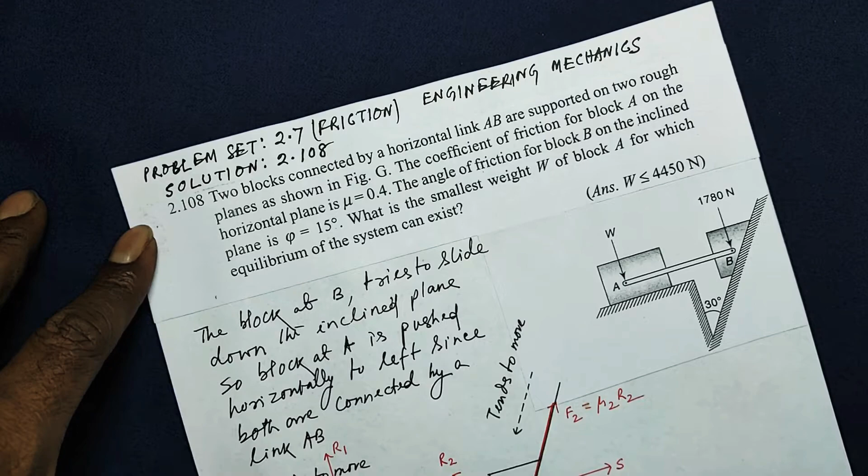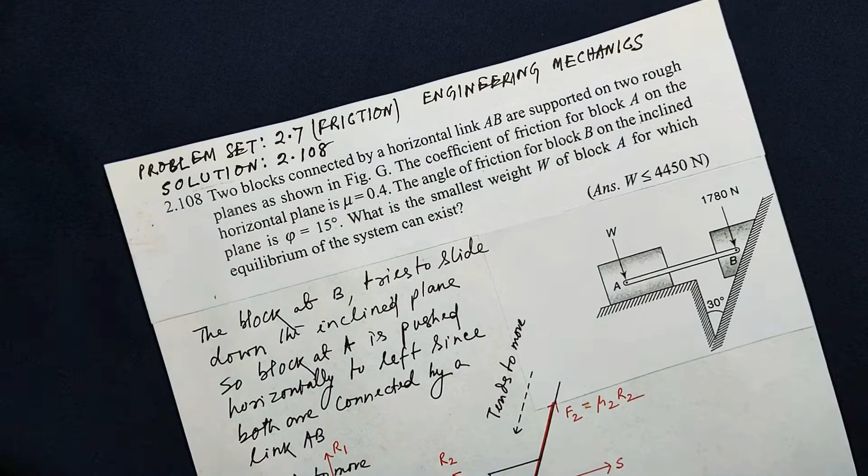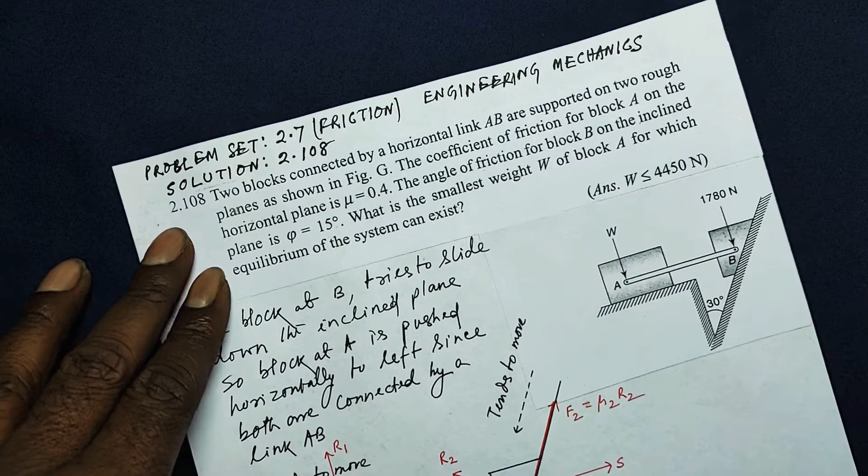Problem set 2.7 from the friction part, solution to 2.108. You can expect such kind of problems if you are an aspirant looking for your JEE Advanced.

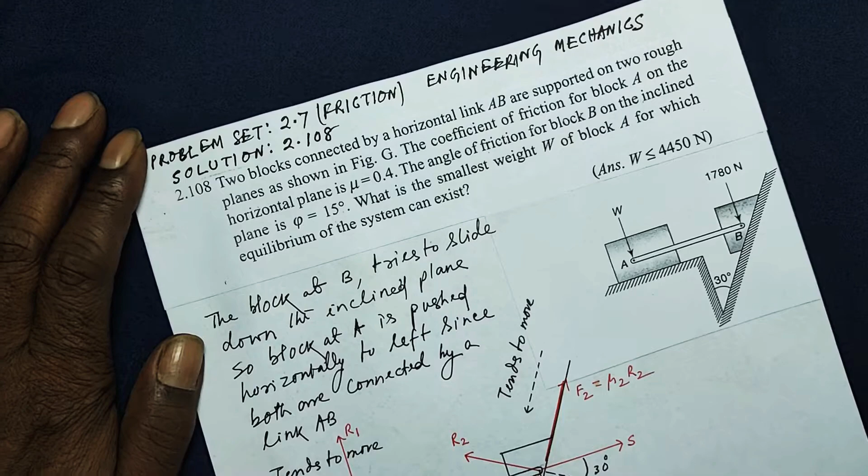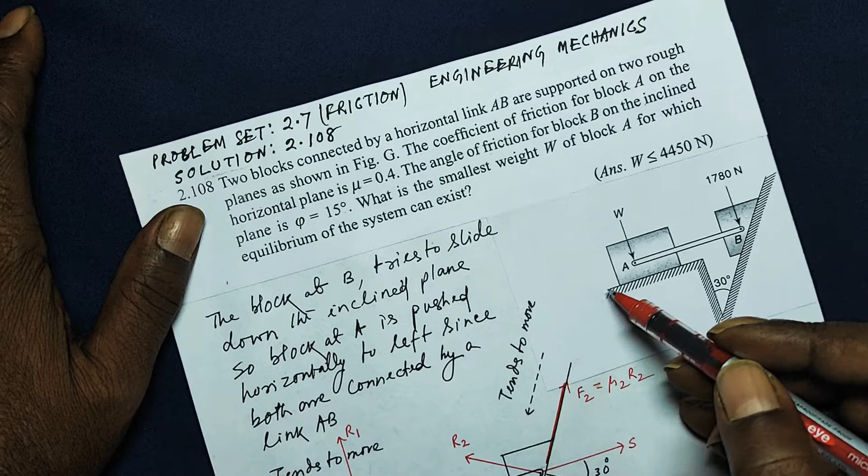So let me read out the statement. Two blocks: here is block A, here is block B. Block B is on an inclined plane, block A is in a horizontal plane, and both the planes are not smooth, there is friction. So two blocks are connected by a horizontal link, as you can look from the diagram, from A to B. This rod is a horizontal link connecting A and B.

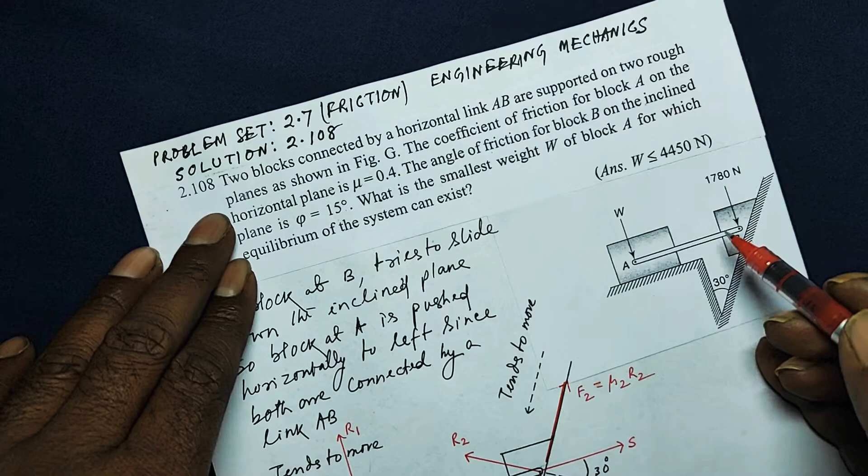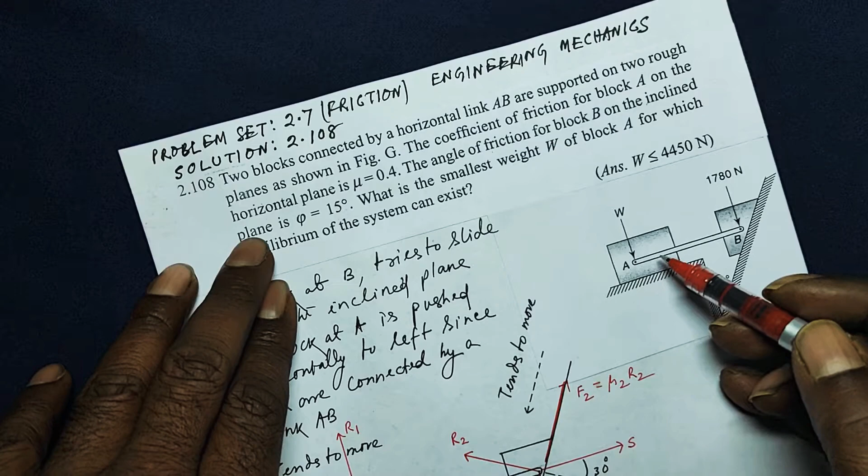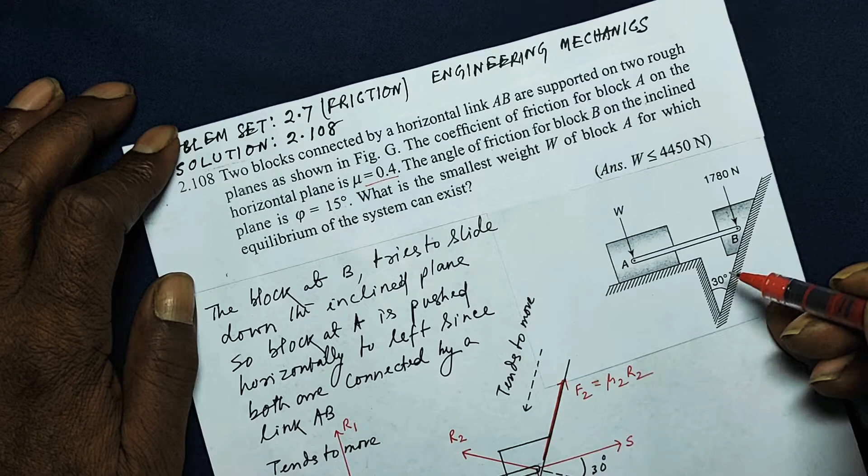Are supported on two rough planes as shown in figure G. The coefficient of friction for block A on the horizontal plane, between block A and this surface, is given as mu equals 0.4, and for the inclined plane, when block B is trying to slide down, instead of giving the coefficient of friction directly, it is given as the angle of friction for block B on the inclined plane, phi equals 15 degrees.

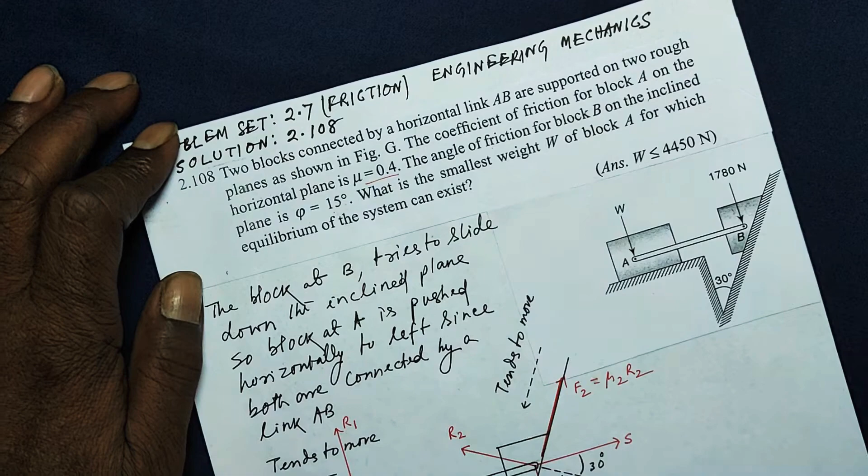What is the smallest weight W of block A for which the equilibrium of the system can exist?

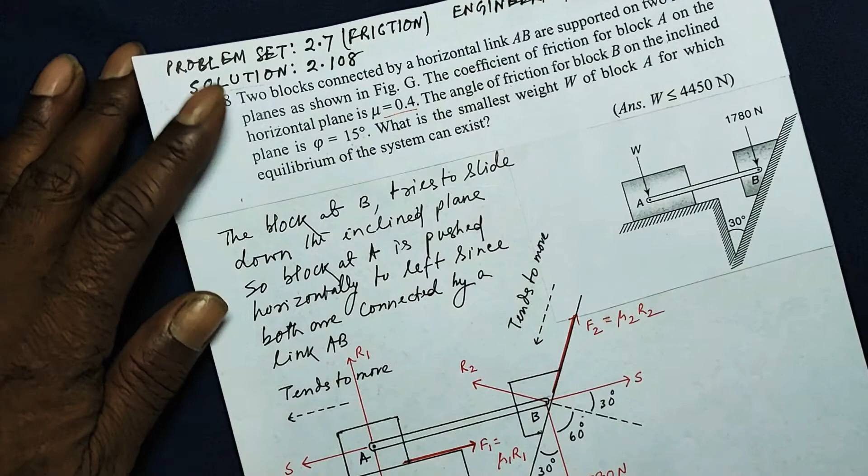So let me explain. There are two blocks, and block B tries to slide down because of a component of its weight.

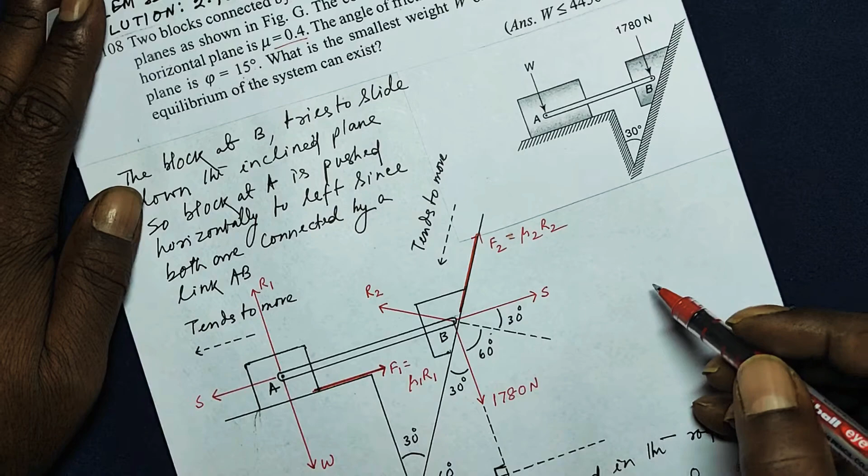As you know, if there is an object on an inclined plane like this, given this angle is theta, its weight is vertically downward mg. So to this side will be mg times sine theta. This is a force. Mg sine theta is therefore a force. So when a block is kept on an inclined plane, it tries to slide down because of mg sine theta, provided this angle is theta.

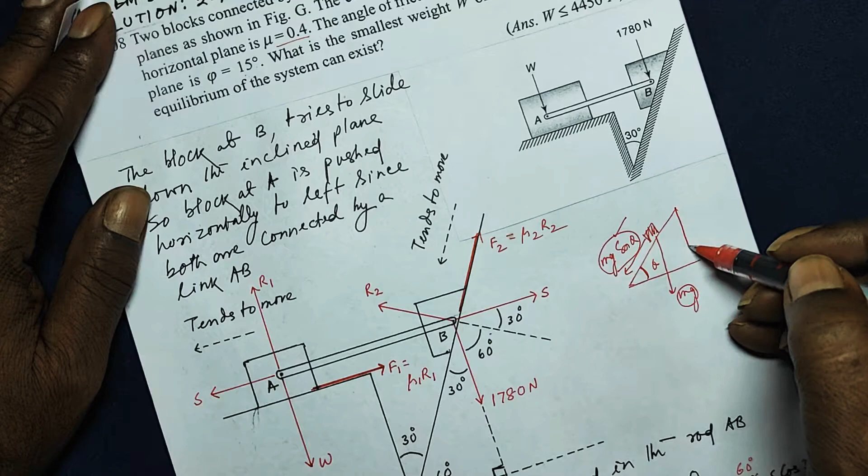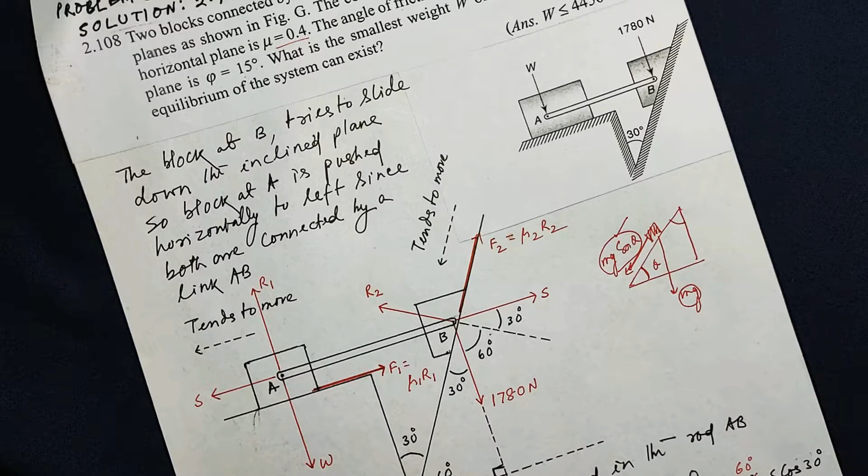Now, if this angle is theta, then this component will be mg cos theta. So one of its components tries to make it slide down the inclined plane. So block B tries to slide down the inclined plane.

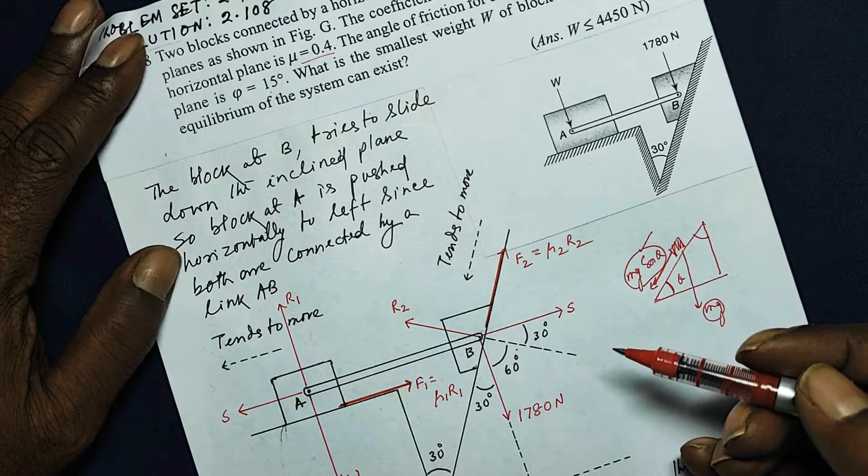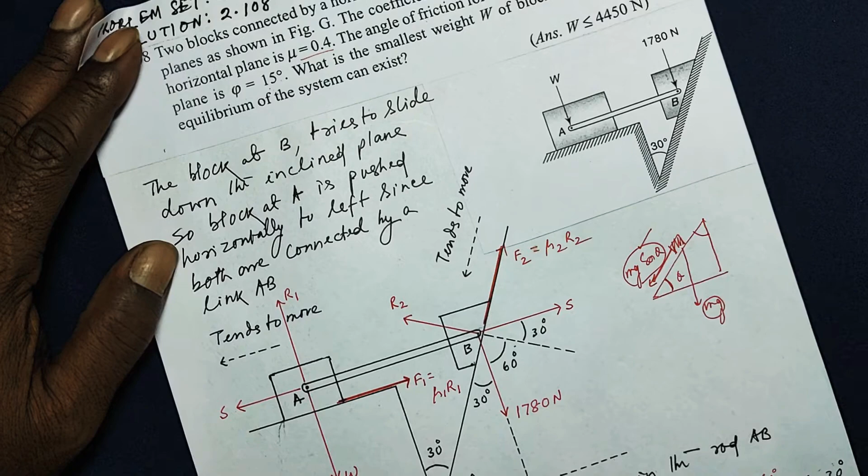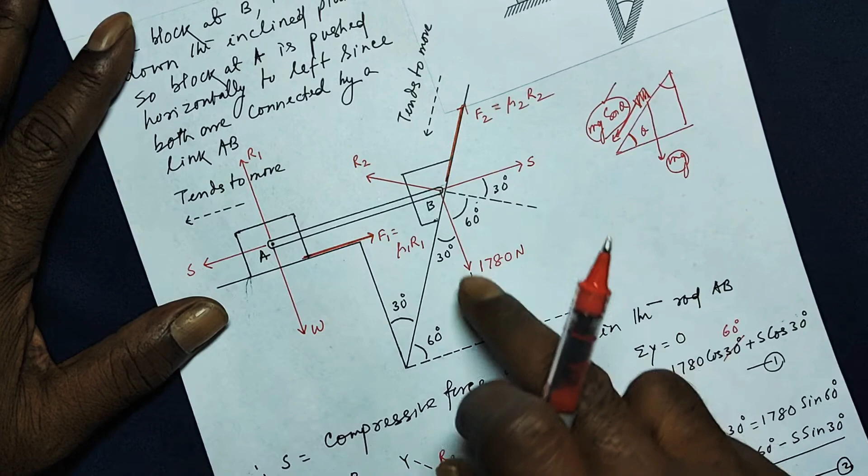So block A is pushed horizontally to the left. When block B is trying to slide down, block A is pushed to the left because both are connected by a link AB. So I have redrawn the diagram for you for better understanding, and the different forces are shown in red color. The same diagram is redrawn here.

So this angle is 30, this is given for block B. The weight acting vertically downward is given as 1780 Newton. Therefore this angle is 90. So in this triangle, this will be 60, because the sum of the three angles in a plane triangle, not a spherical triangle, a plane triangle, is 180.

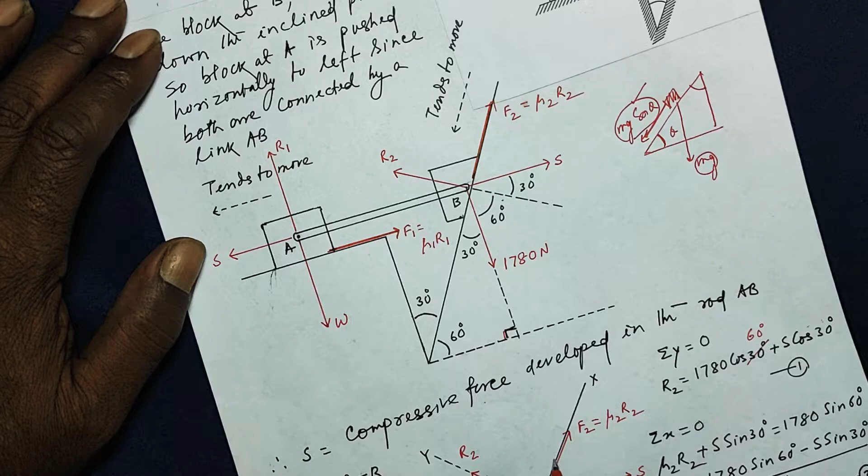Now this is given as 60. Since block B is trying to slide down, it is tending to move this way, so the force of friction F2 is to this side, that will be mu2 times the normal reaction, where mu2 is the coefficient of friction between block B and the inclined plane. And when block A is pushed to this side, towards the left, between the surface of contact, between this surface and the lower part of block A, the force of friction, let it be F1, will be mu times the normal reaction here.

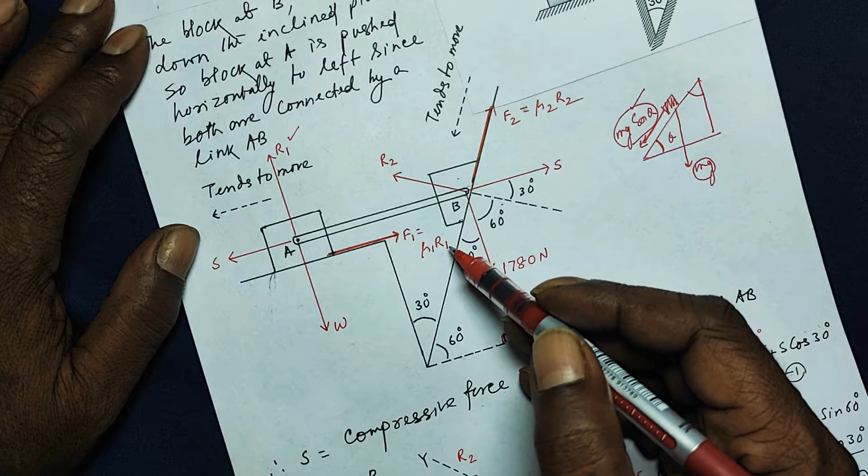And the action force is W, so the reaction force is, let it be R1. So F1 will be mu1 times R1. And in the connecting rod, connecting block A and block B, there will be a compressive force: for block A it will be to this side, and for block B it will be to this side.

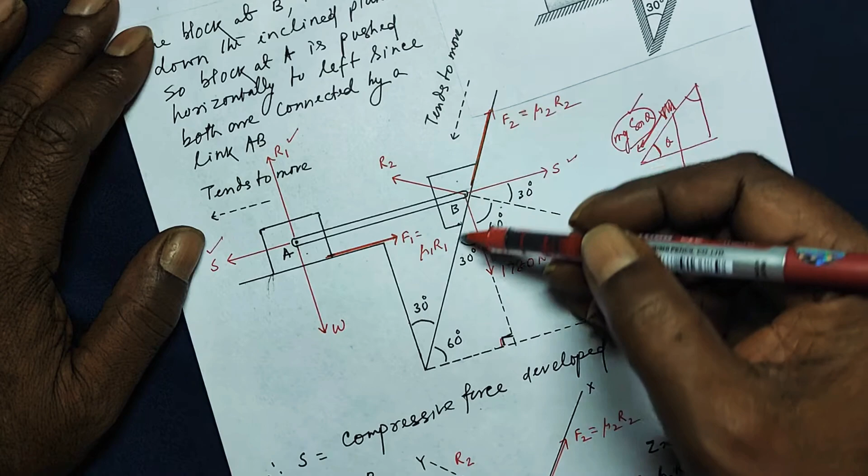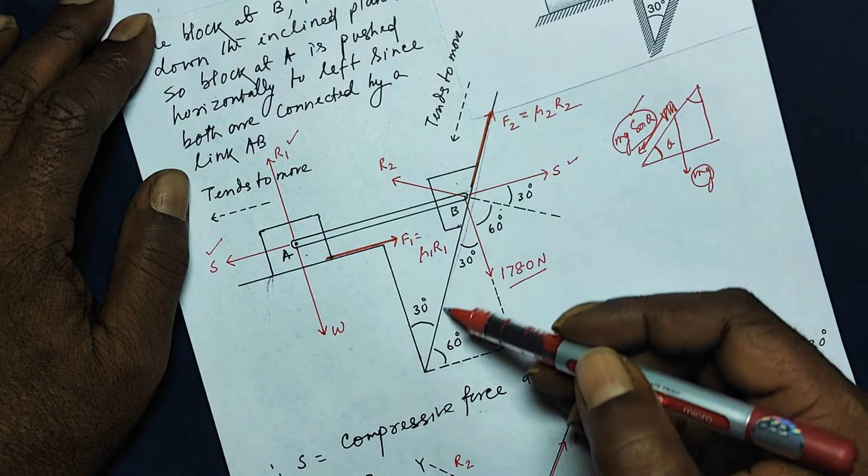Now all the forces are shown here. Here the reaction force R2, normal reaction, because this is the surface, so the reaction will be normal to that, R2. And why R2 will arise? Because a component of this 1780 Newton will be pushing this inclined plane to this side, called action force. So due to that, there will be a reaction force R2 exactly opposite to that.

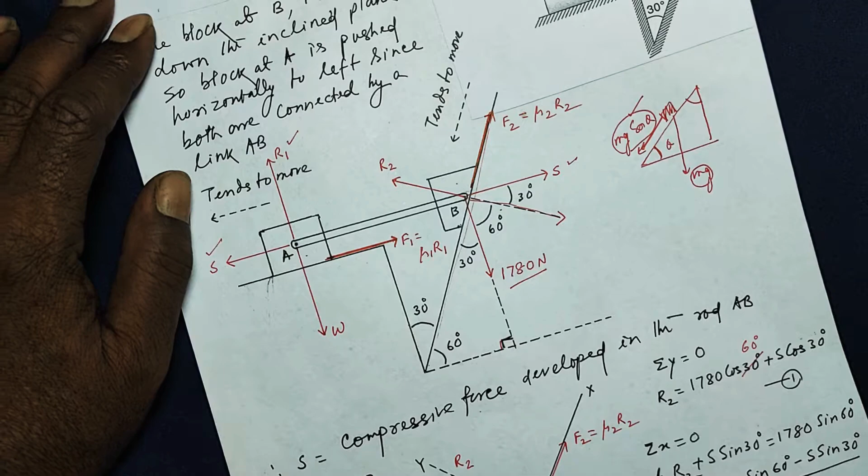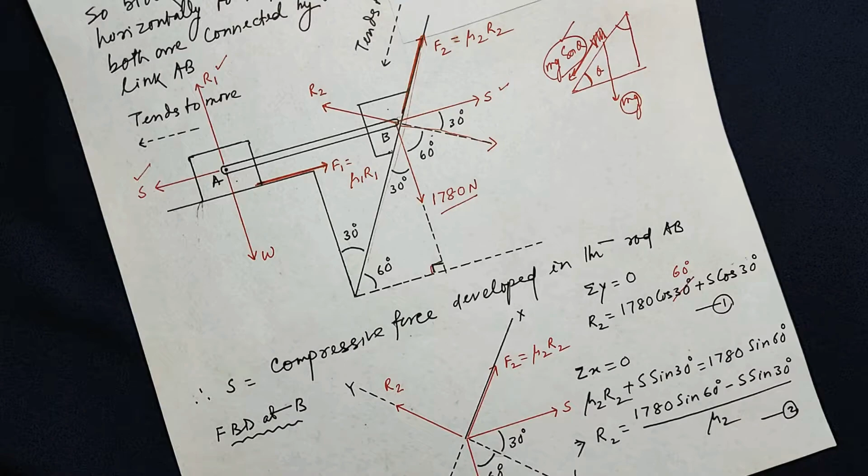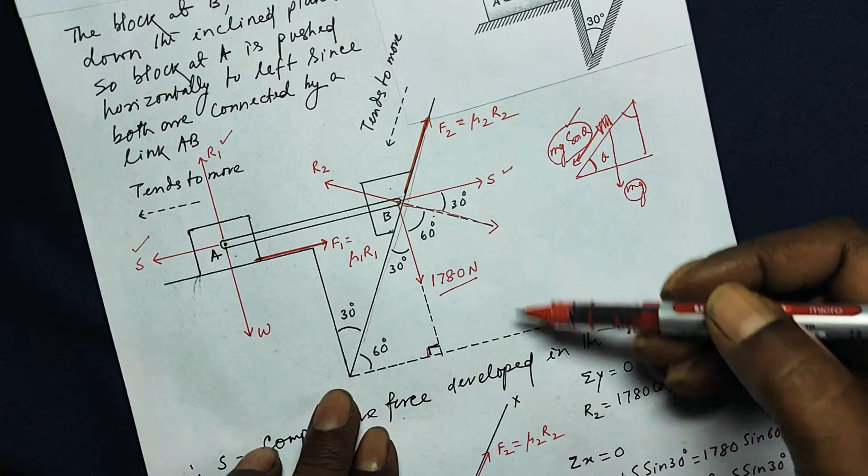Now, once that is clear to you, let us consider point B and resolve the different forces along the x-axis and y-axis. Let us consider this as x-axis and this as y-axis, which I have redrawn here in a different diagram. So this is your x-axis, and this is your y-axis, right?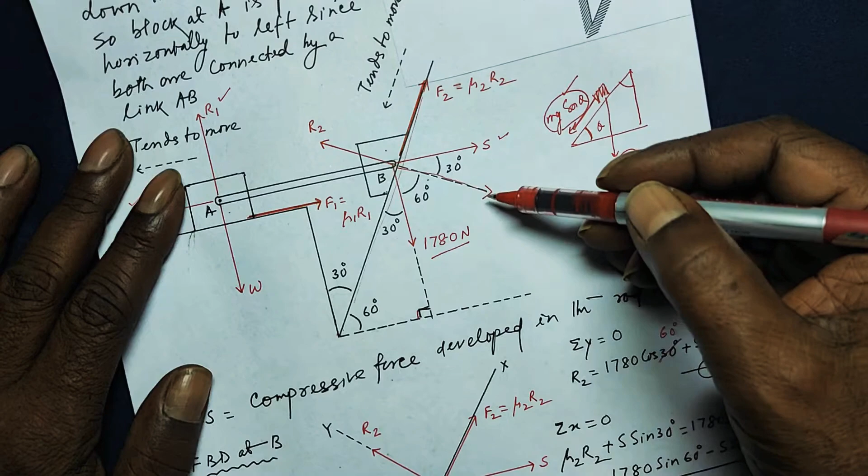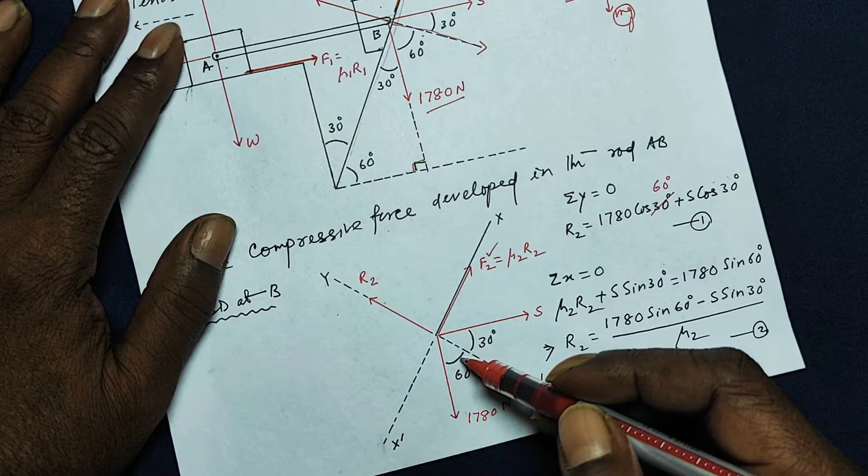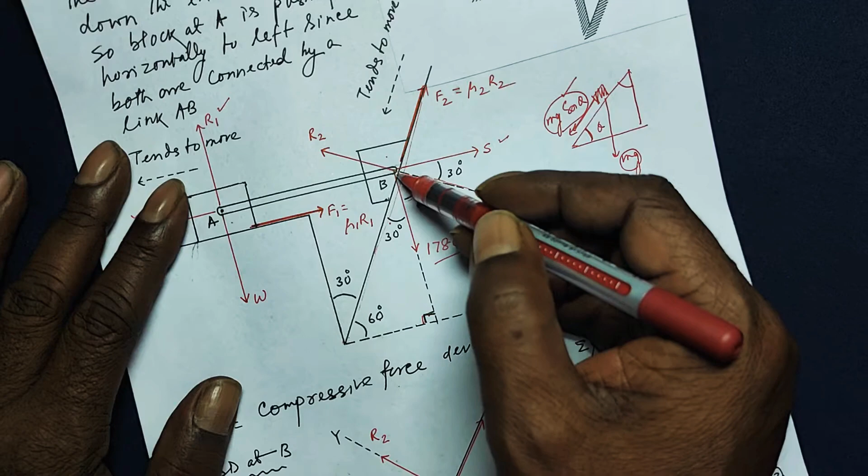So F2 is along the positive x-axis, the force of friction between block B and the inclined plane, and the weight 1780 Newton acting vertically downward. This angle, I explained how this is 60, because this is 90, 60, 30. This is x-axis, this is y-axis, so this has to be 60. This is vertical, this is horizontal, so this will also be 30.

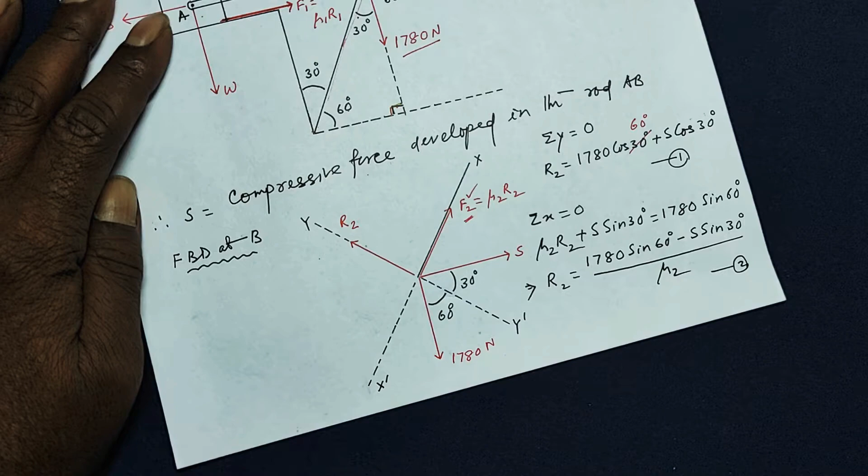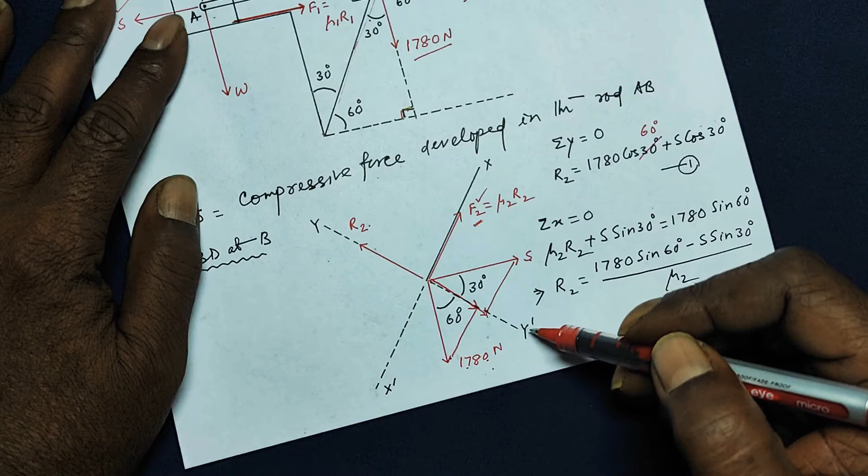Now let us apply sigma y equals 0. F2 is completely along the x-axis, so this will not have a y component. Now R2 is along the positive y-axis, so that is to be balanced by forces along the negative y-axis. If you drop a perpendicular from the tip of this force to here, that will be 1780 times cos 60, and from here if you drop a perpendicular on the negative y-axis, that is the component of S along negative y-axis, so that will be S cos 30.

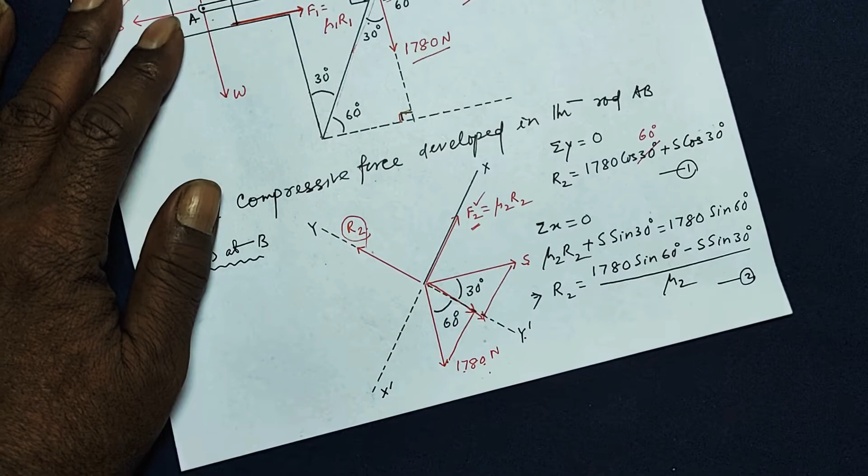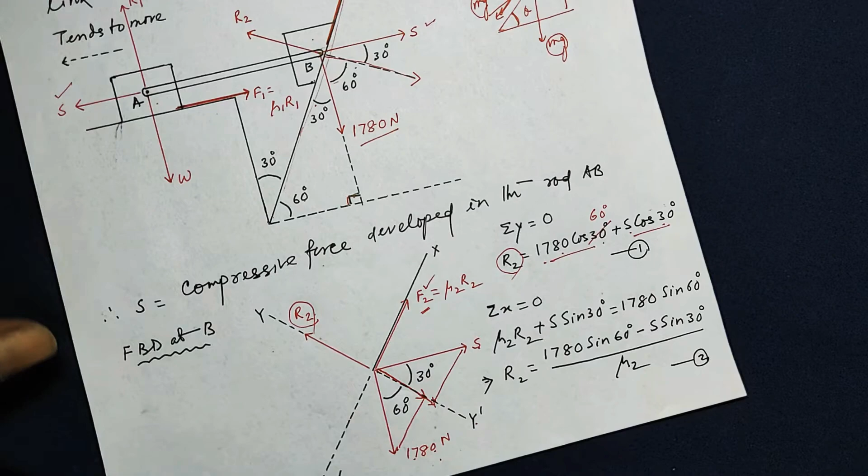So R2 is opposed by two forces, that is 1780 cos 60 and S cos 30. These two are along the negative y-axis, and this is along the positive y-axis. So for equilibrium, I make them equal. Now then apply sigma x equals 0.

F2, that is mu2 times the normal reaction R2, is along positive x-axis. So that is to be balanced by some forces along negative x-axis. The component of 1780, if you drop a perpendicular from this point to this point, this component will be 1780 times sine 60.

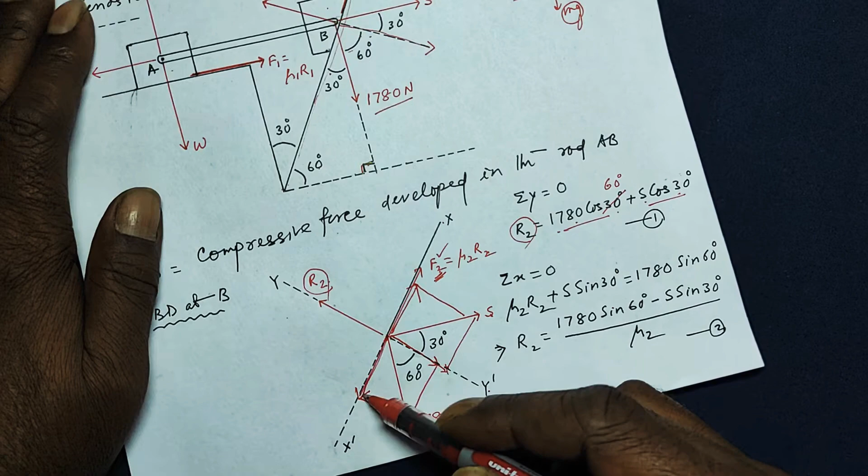And if you drop a perpendicular here, this one will be S times sine 30. So S times sine 30 and F2 are along positive x-axis, balanced by this component of 1780, that is 1780 times sine 60. That is what I have written in equation 2, taking sigma x equal to 0.

Mu2 times R2 plus S sine 30, because they are in positive x-axis, balanced by 1780 sine 60 along negative x-axis. Take this term to the right hand side and mu2 to the right hand side, so you are left with R2 equal to 1780 sine 60 minus S sine 30, over mu2 — your second equation. Here is R2 and here is R2.

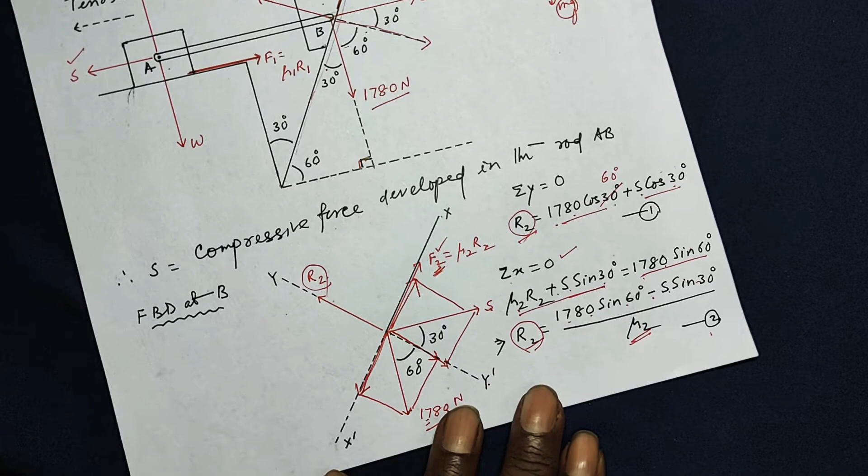So let us make them equal in the next phase and solve and find out the value of S.

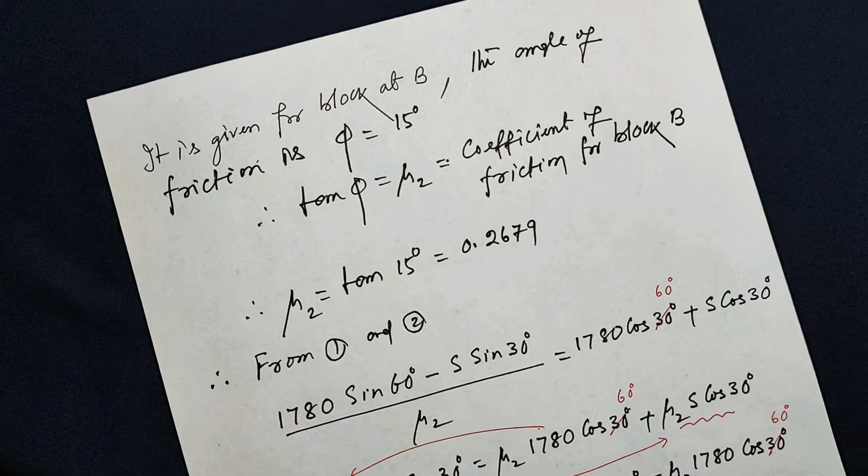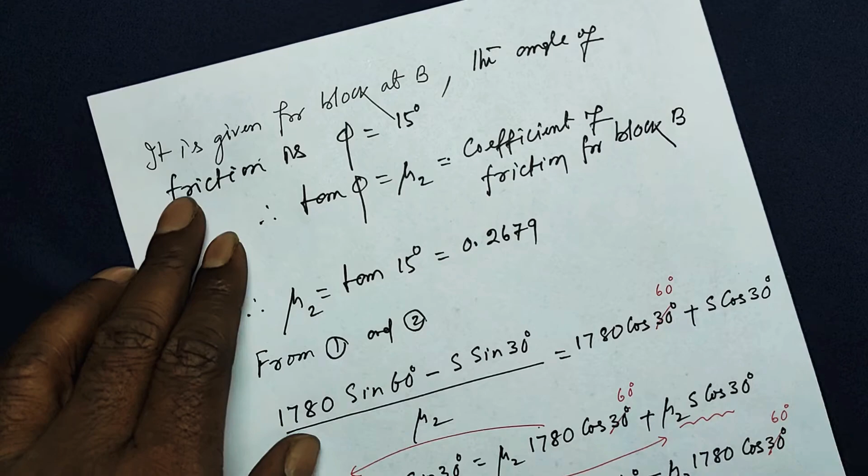Now the question is, how much is mu2 here? Mu2 is not known directly, but it is given for the block B, the angle of friction phi is 15.

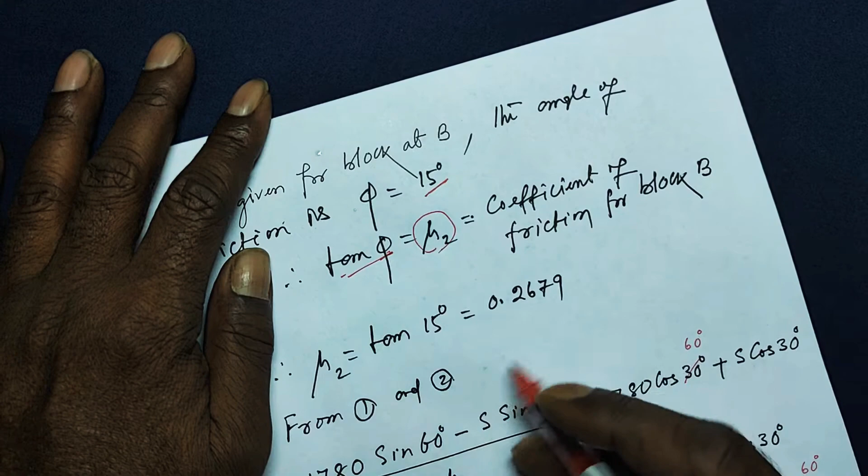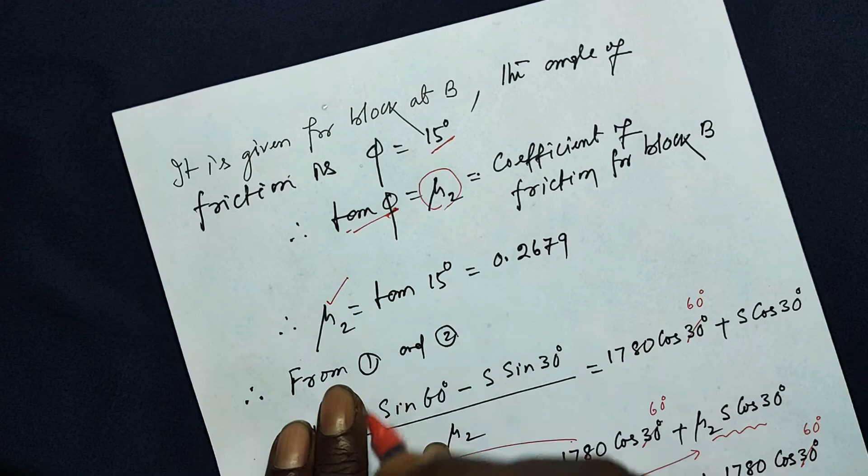In your school days, you must have learned the angle of friction or the angle of sliding — tangent of that is nothing but the coefficient of friction. Since phi is given in the question as 15 degrees, tan of 15 will give you the coefficient of friction mu2 between block B and the inclined plane. That comes out to be, if you put it in a scientific calculator, 0.2679.

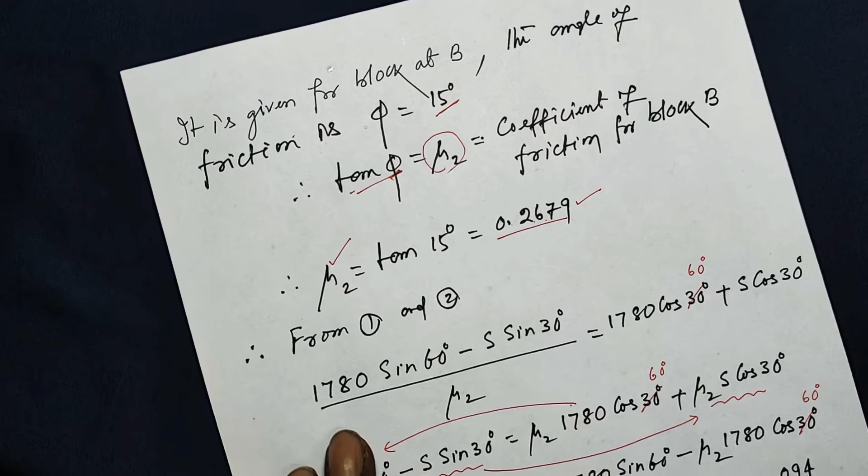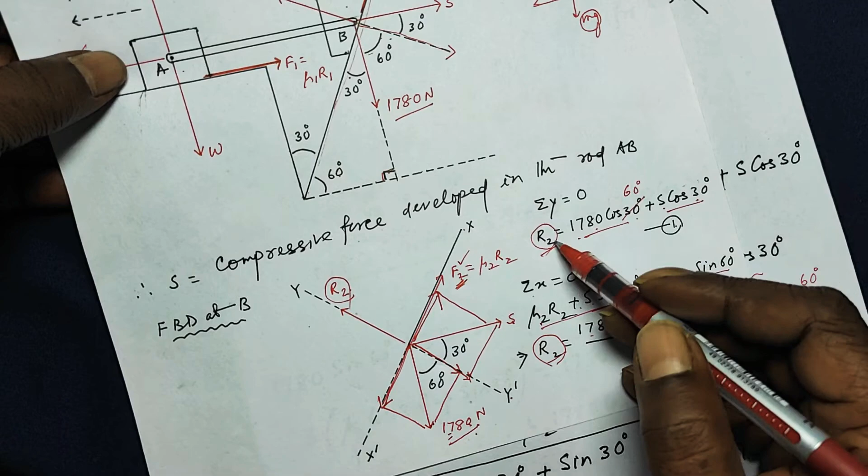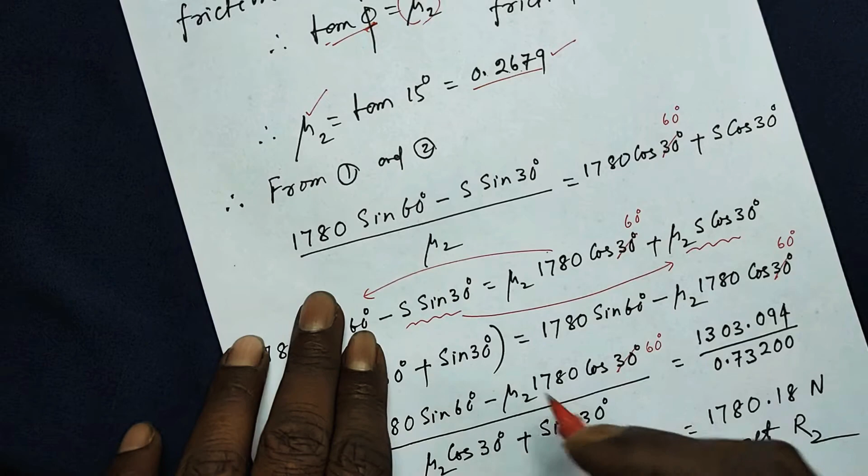Now make the right hand sides of equation 1 and equation 2 equal, because the left hand side of equation 1 is R2 and the left hand side of equation 2 is also R2, so the right hand sides must be equal. So I have made the two right hand sides equal.

Make a small correction here — this is not 30, this is 60.

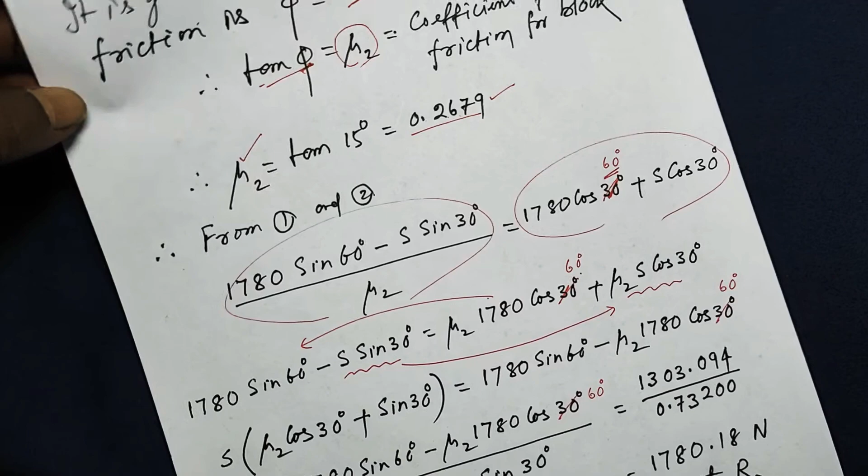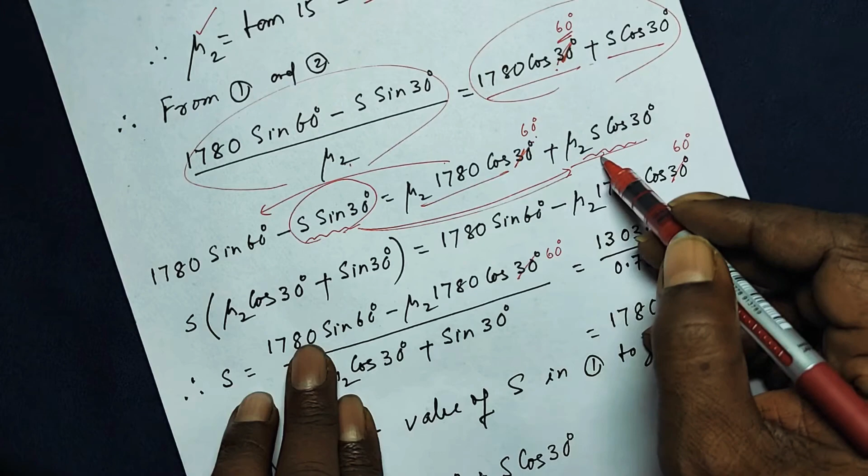So what you do is cross multiply. If you cross multiply, mu2 is taken to the right hand side, so it's multiplied here, and mu2 is multiplied here also. Now you have to make some side changes — bring this term to the right hand side, keep it with this term so you can take S common, then bring this term to the left hand side.

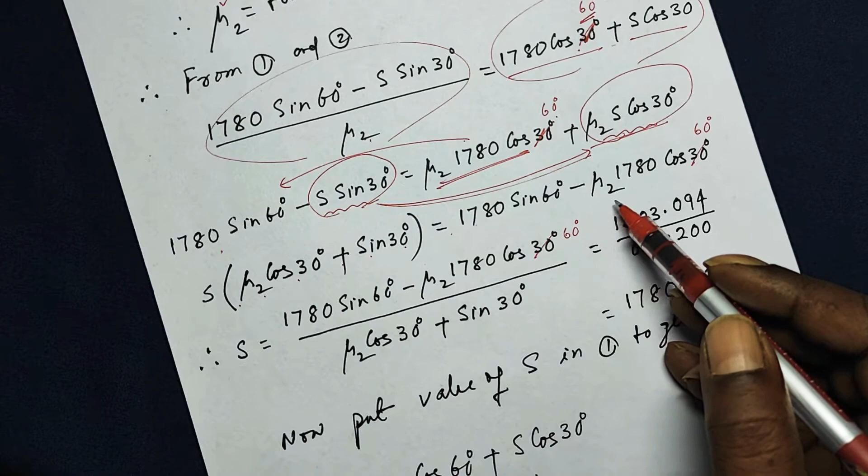By taking S common, we are left with S times mu2 cos 30 plus sin 30 equal to 1780 sin 60 minus mu2 times 1780 times cos 60. This is not 30, this is 60 — this is not 30, this is 60.

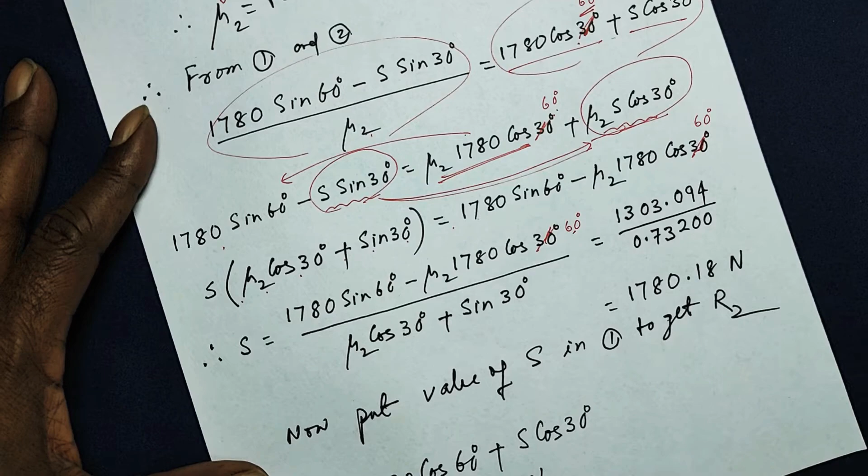So now this term is multiplied here on the left hand side with S. If you take it to the right hand side, it is divided.

Now put all these values in a scientific calculator. I have taken them individually, calculated the value of the numerator in the calculator, and the value of the denominator in the calculator. If you divide, you get 1780.18 Newton as your value of S.

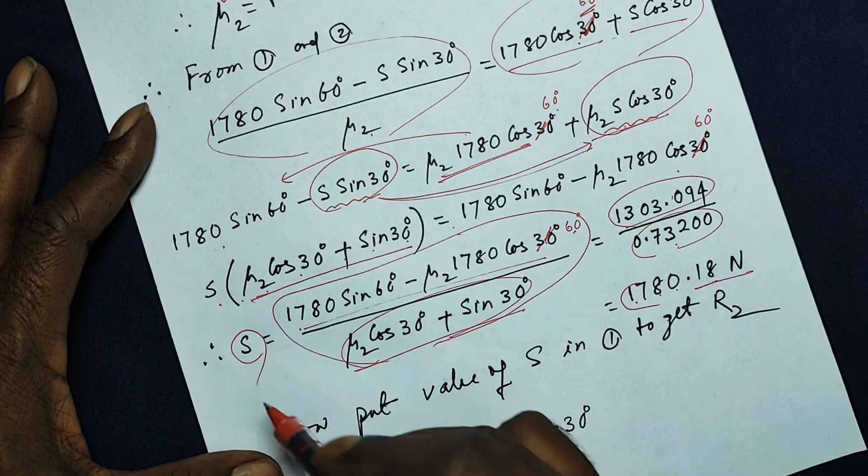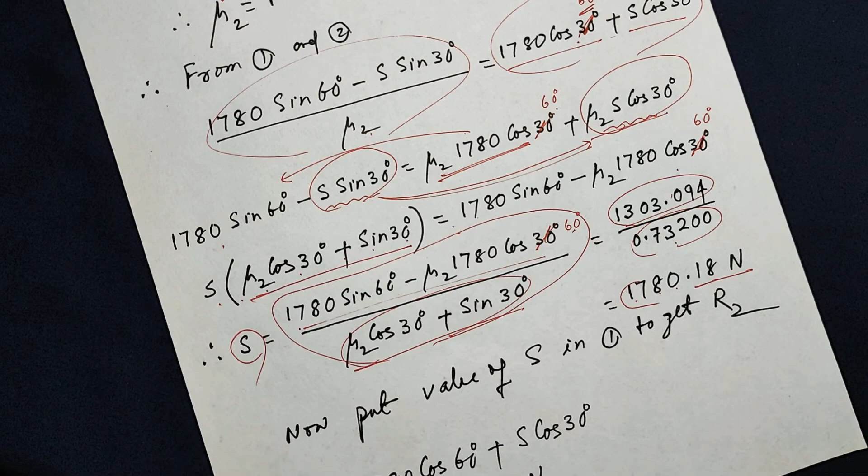Now since S is calculated, you can go back to equation 1 or equation 2 and put the value of S to find out R2. You can do it either way, so now put the value of S in equation 1 to get R2.

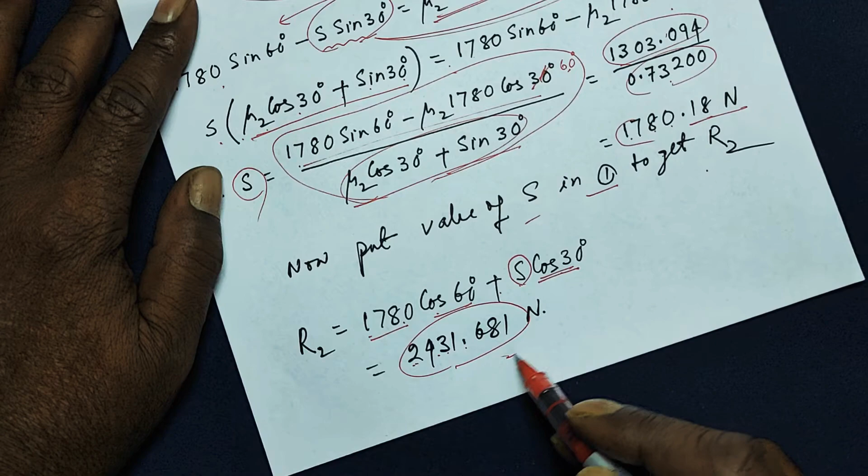So your R2 is equal to 1780 cos 60 plus S times cos 30. Now put the value of S here, cos 30, cos 60, 1780. This comes out to be 2431.681 Newton. Once that is done, we are only left with a few minutes to finish the problem.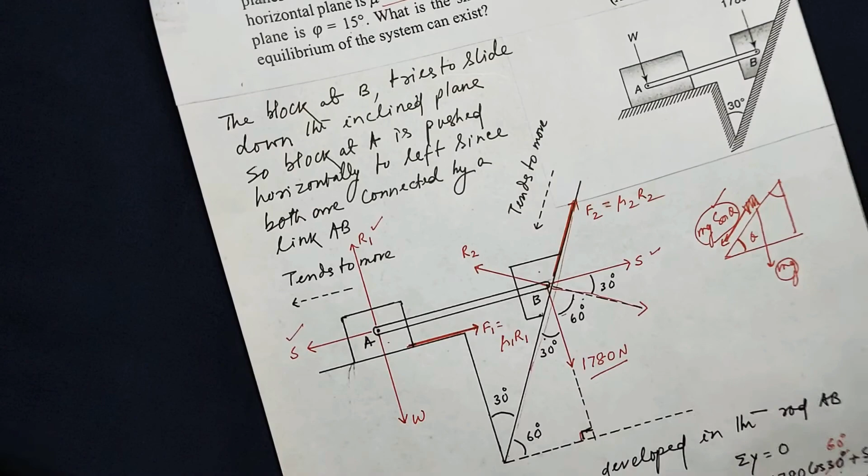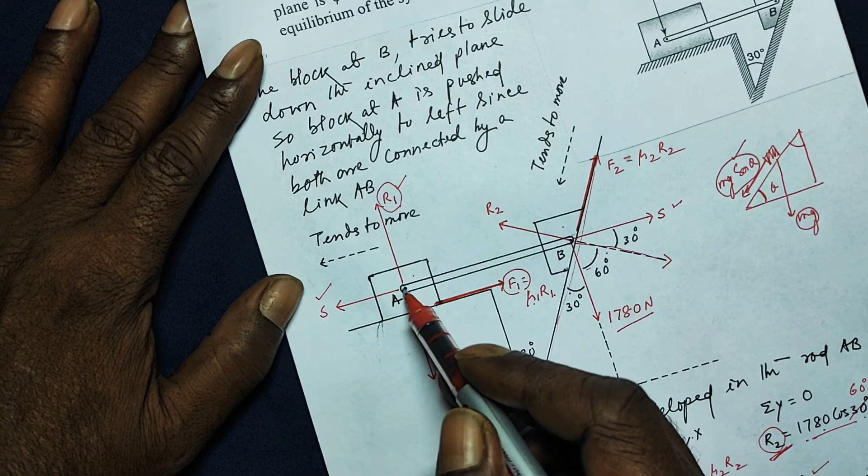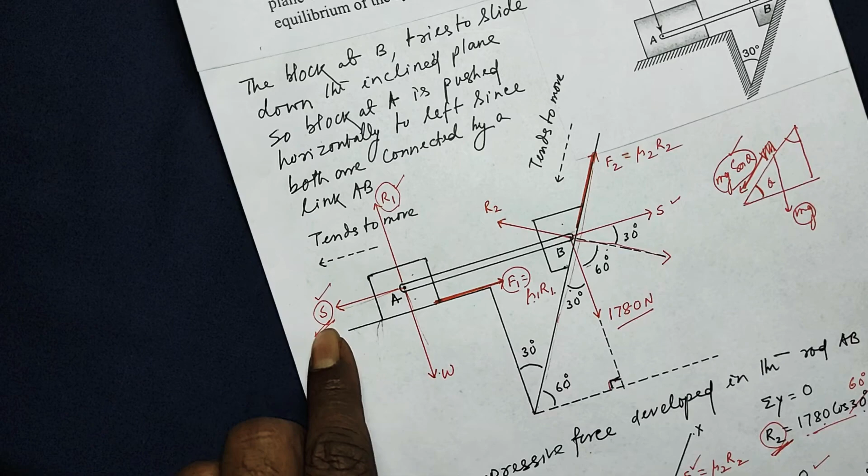Now come back to the original diagram. Let us apply the conditions of equilibrium for the object at A. W is to be balanced by R1, and to this side the force of friction F1, which is mu1 times R1, is to be balanced by the compressive force S, which we have already found out. So for equilibrium of this body, R1 is balanced by W, and S is balanced by F1.

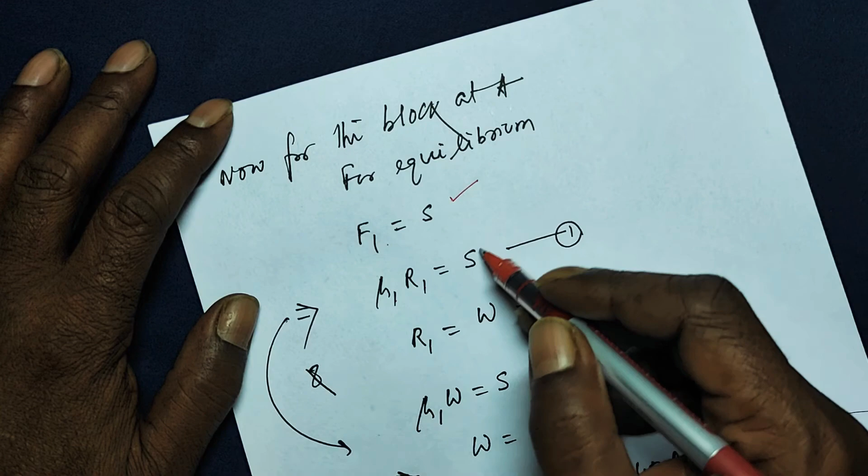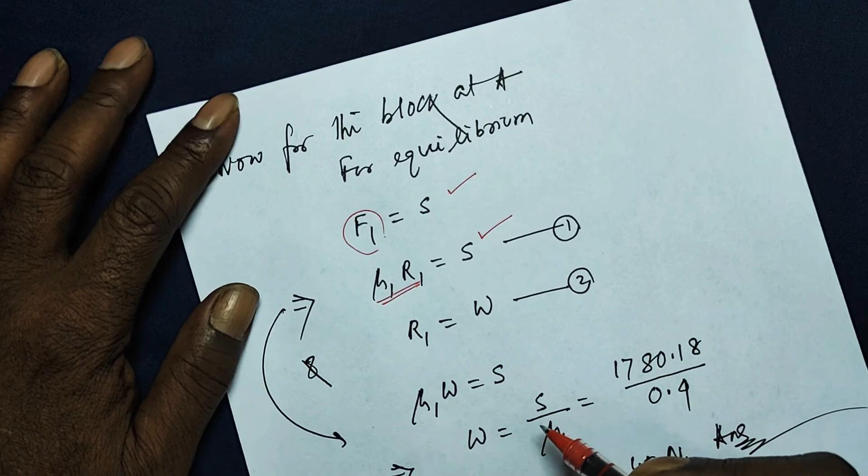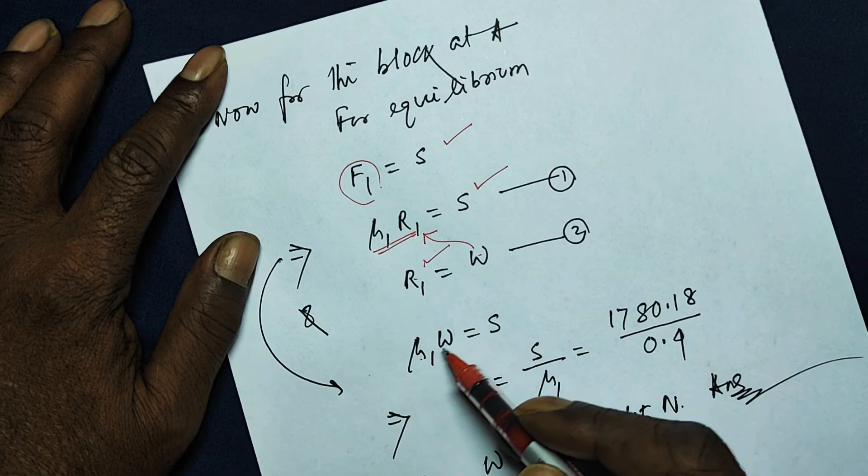So that's all. Now for block A, for equilibrium, F1 equals S, mu1 times R1 equals S, because the force of friction is this. Now for equation 2, along the y-axis, R1 equals W.

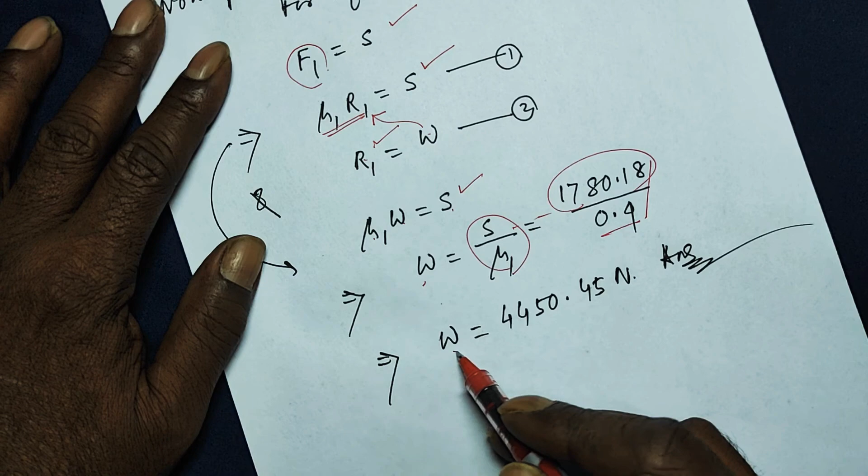Now put this W here, so you get mu1 times W equal to S. So W is equal to S over mu1, and since mu1 is given and S we have calculated, just divide, you get W equal to 4450.45 Newton.